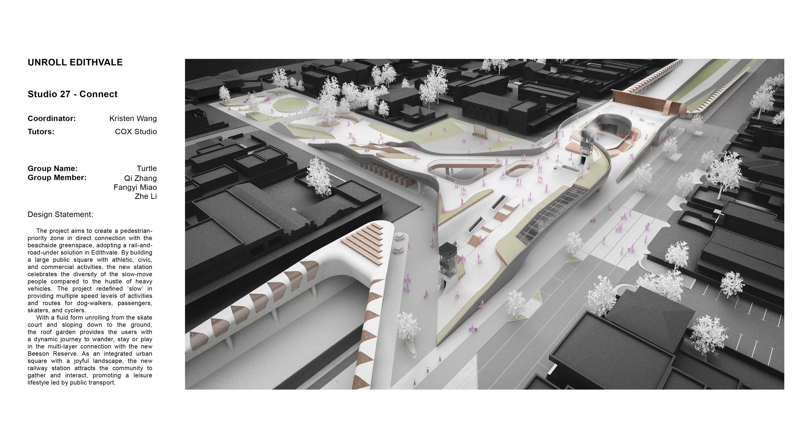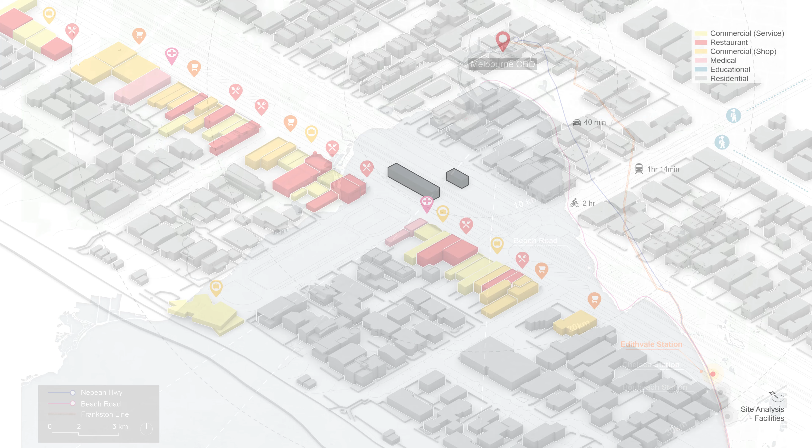Our site is in the suburban half of the Frankston train line, which is 30 kilometers away from CBD but easily accessed by the public transport. The site is mainly surrounded by residential area with a small commercial street along Nepean Highway. Besides convenience shops and restaurants, there are two primary schools in this area.

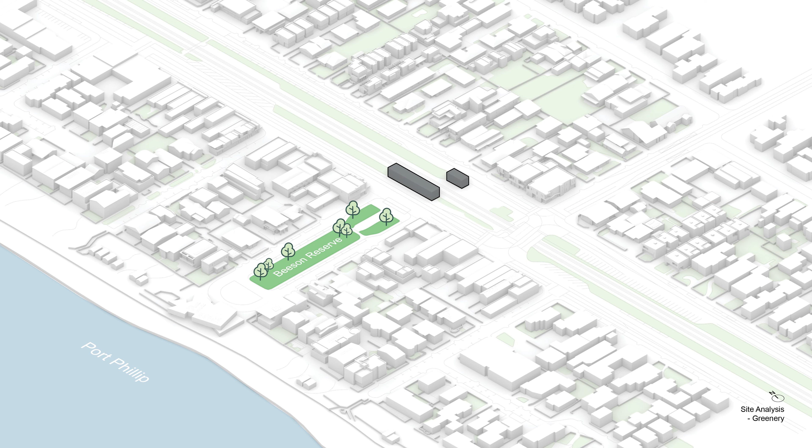Compared with other sites, Edithvale has an existing green space named Beeson Reserve, connected with Port Phillip. It is the only public space in this area, but not used quite well. Therefore, we choose Edithvale as our site and hope to use the existing empty space and make better connection to the beach. For the transport system, the current station is closed road type, which blocks the local circulation a lot. Nepean Highway and Edithvale Road are the main streets in this district.

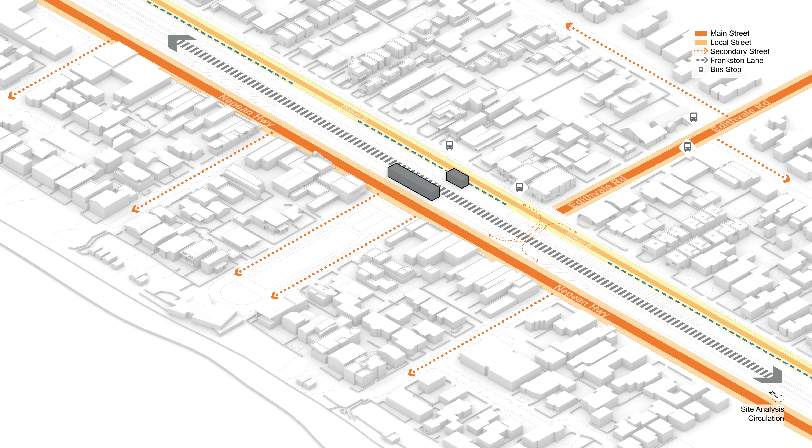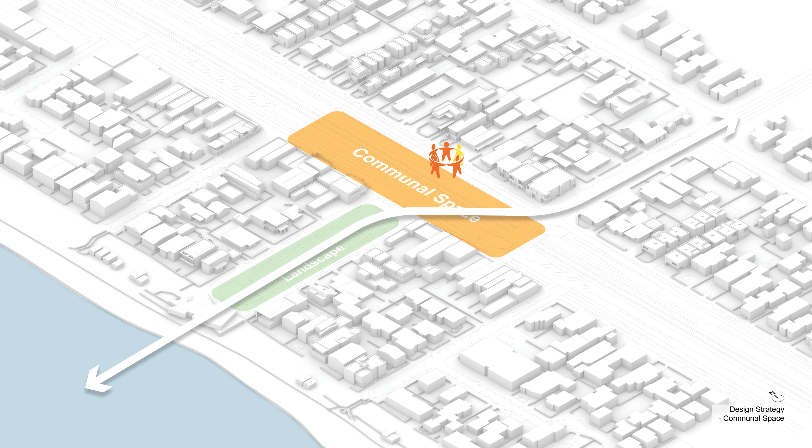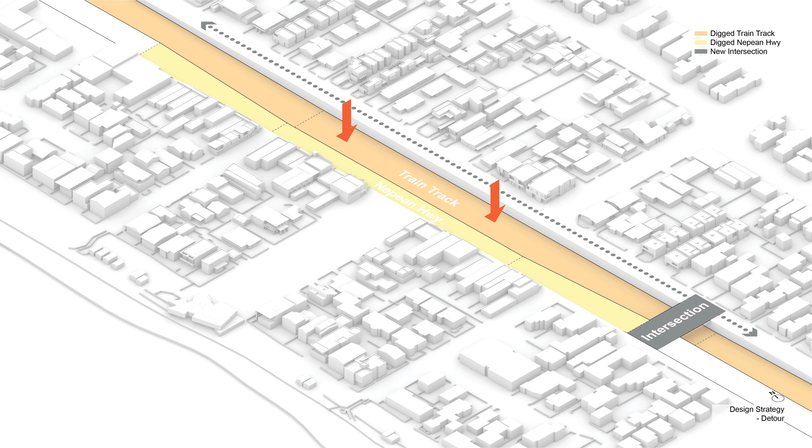For concept, we firstly want to bridge the green empty space with eastern residential area to build a strong connection for pedestrians. And then we want to add a car-free communal space in the center to encourage residents to come here and provide a space where people can really sit down and relax. But the problem is, Nepean Highway and the current train line highly block pedestrian circulation. So to move towards our scope, we must dig down both Nepean Highway and train line, but keep Station Street on the ground level for basic vehicle circulation.

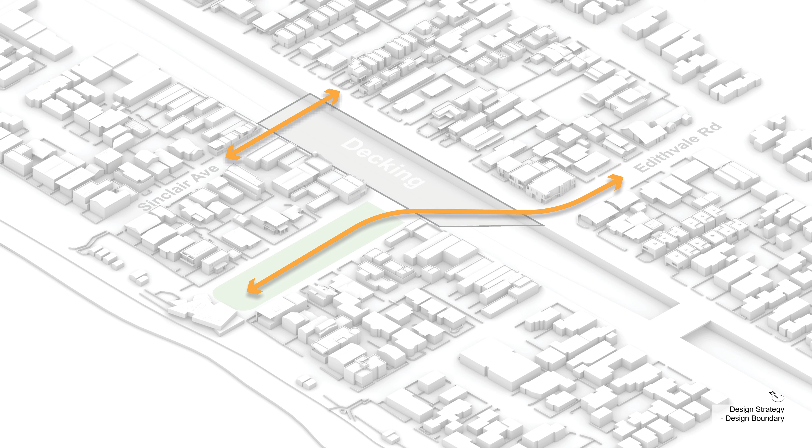At this step, we build the car-free decking for slow-move activities. The decking boundary is defined by the extension of Sinclair Avenue on the northwest and the Edithvale Road on the southeast. And here are the buildings that we have to demolish for new local streets. We moved the current intersection 100 meters away to the south, and the train began to lift after the crossing here. The length of underground train track is around 900 meters in total. One of our concepts is to introduce the local bicycle sport to our project, so we designed a continuous bike lane in Station Street. Considering the safety, the sidewalk is extended 3 meters inwards above the embankment.

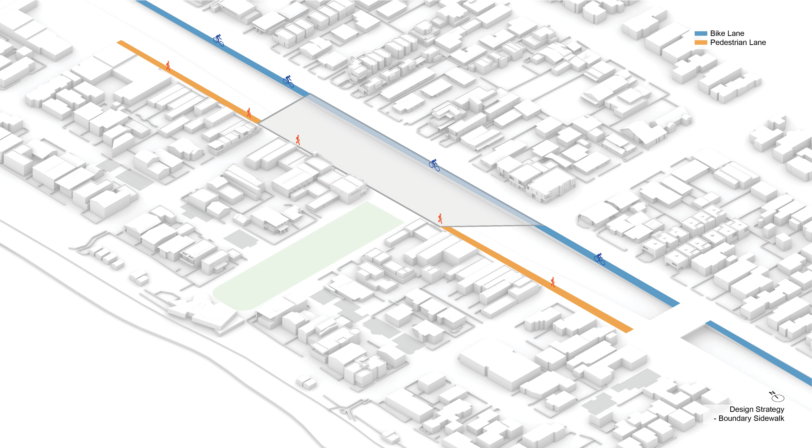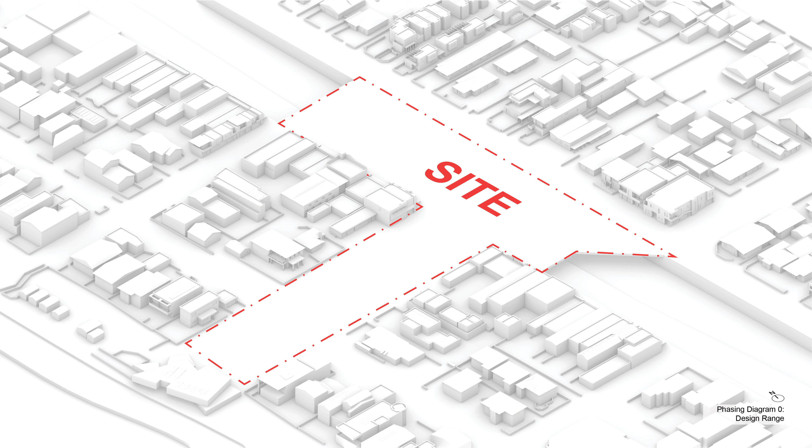After our strategy for the surrounding circulation, now we move to the architectural design process. As the initial concept is to bridge the Edithvale Road and beach, we include Beeson Reserve in our design range. To guide pedestrians to the beach, our functional division begins with the circulation outside the site. In this way, the whole site is cut into 5 parts. As the station is the main body of the project, it is placed in the central area close to the Station Street. The rest 4 areas are considered as activity area and transitional area respectively.

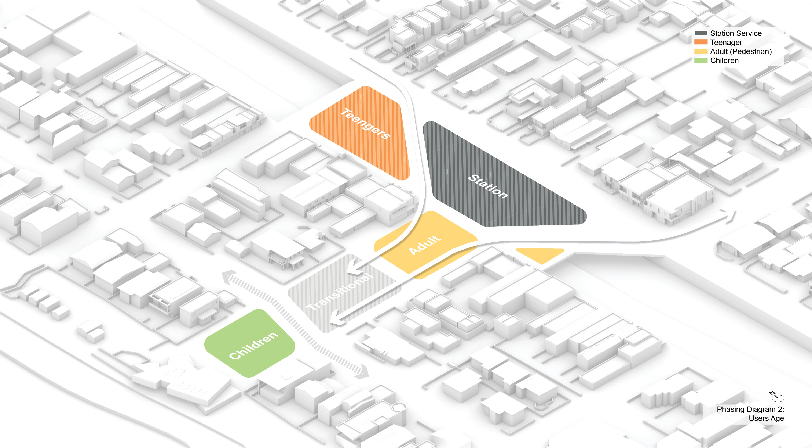When we subdivided the activity areas outside the station, we firstly must ensure that one activity can be featured as the big idea and at the same time others can satisfy different user groups. Therefore, we divided by user's age, that is children, teenager, and adult. Since the original idea was about introducing cycling to our site and promote some local sports, we defined the teenager area on the north side as a skate park, and the southern area as a slow-move pedestrian zone.

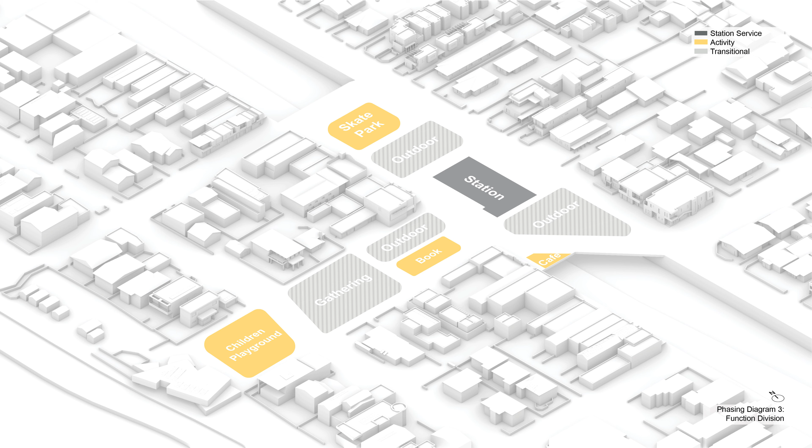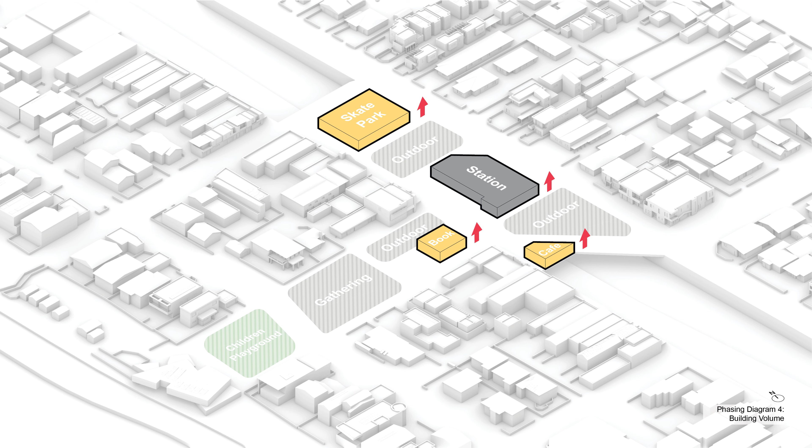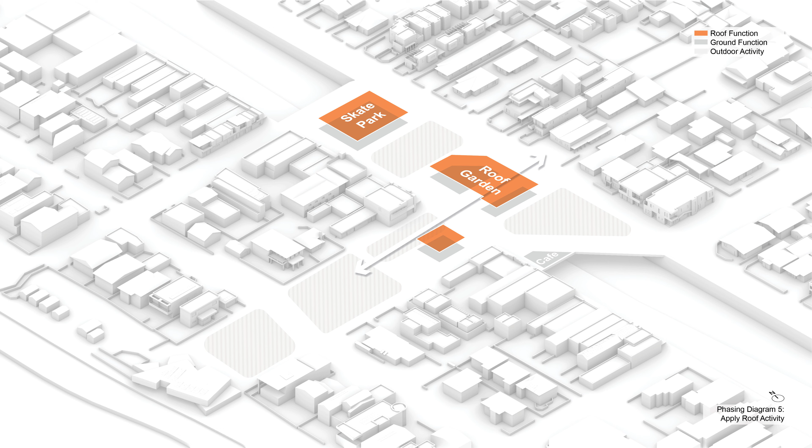In this step, we started adding building volumes. The thing is that we don't want too many indoor elements in the site, so we can see there are always outdoor spaces between each volume as transitions. During the process, we imagine when people come here, they can have a sense that only belongs to the outdoor and a feeling that they can naturally breathe. In addition, as our site is close to the beach and has a quite comfortable climate, we also want to use the roof as an observation deck, so that people can enjoy the local view from the height when they have morning exercise or walk their dog here.

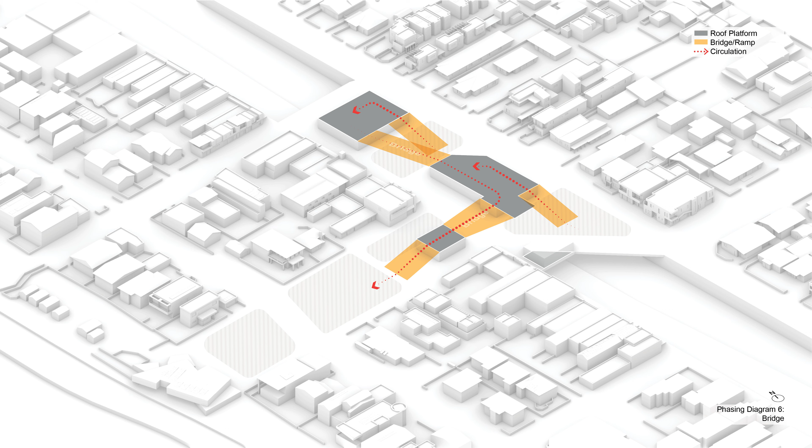Here, we bridge each building volume and connect the ground and roof smoothly. As the skate park is one of the key features in our station, when we designed the form, we decided to introduce a similar design language. The idea is from the flow element in skateboarding, like a constant circulation, so pedestrians can access every part in this project without the lift. We jumped here with more details and the refined shape.

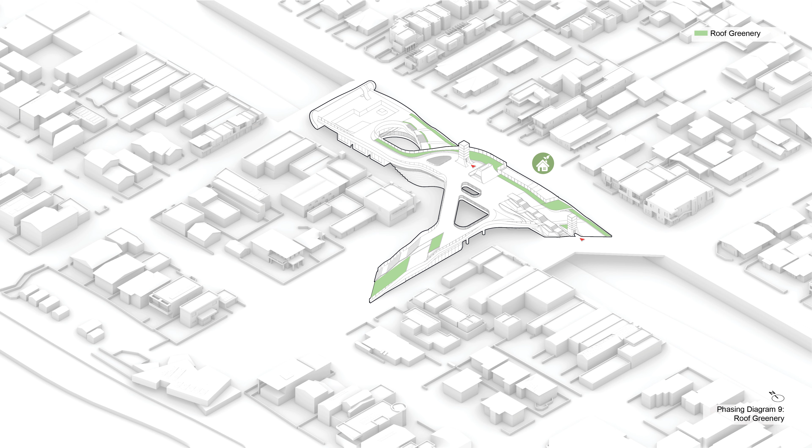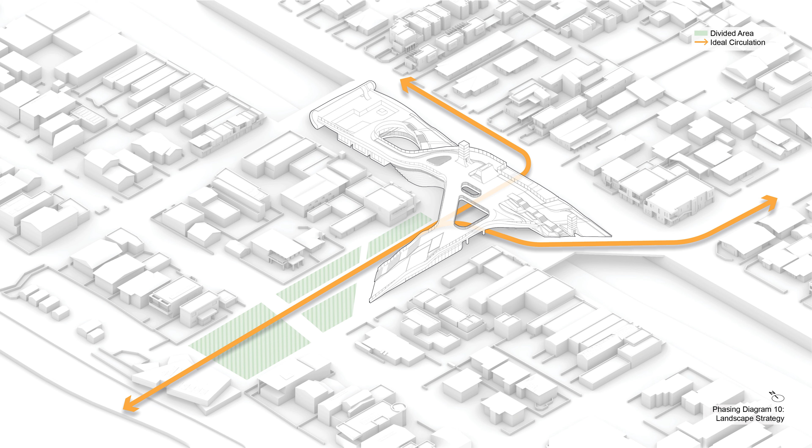To ensure the internal natural light and ventilation, lots of volumes on the roof are subtracted as openings. The vegetation on the roof is used as partition nearby the edge to protect eastern residents' privacy. More importantly, we want to create a sense of roof garden that people can really relax more. And of course, this can form a microclimate in environmental perspective. In terms of the landscape design, the main idea is to create an access directly to the sea and place different programs along the circulation. To interact the station volume and landscape design, we set an outdoor piazza in the center of our site, which represents another slow activity.

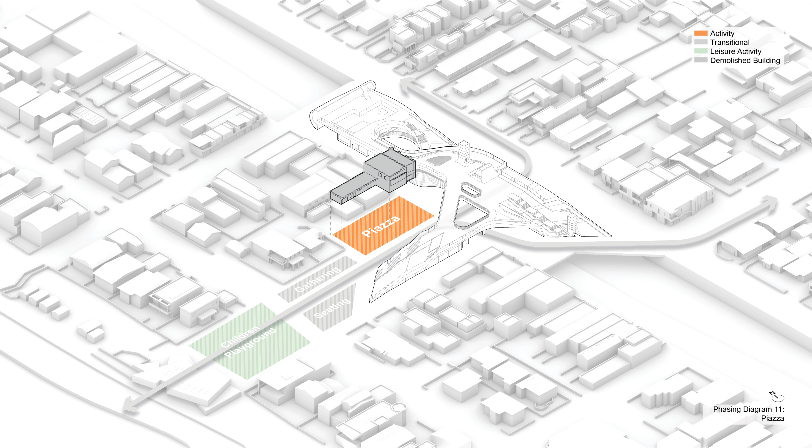For better proportion, we remove the current Thai restaurant. Considering the change with time, the piazza can be a place to sit and perform during the day, while being an outdoor cinema at night.

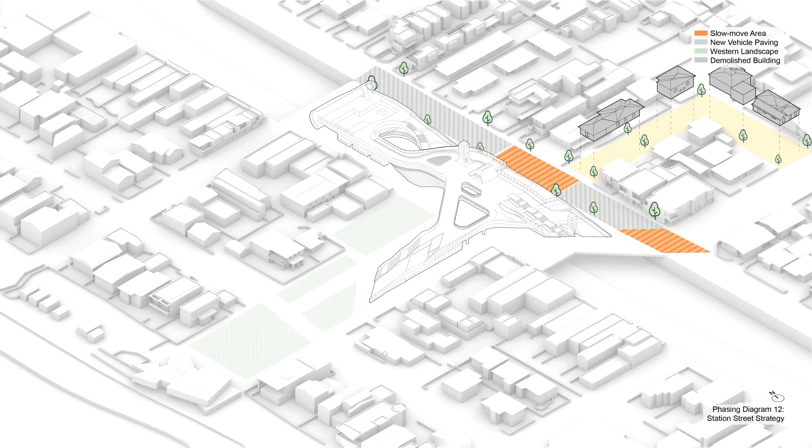Instead of filling intensive programs everywhere, we are trying to keep the space as empty as possible actually. Because in our opinion, empty means flexible. We give pedestrians the choice to walk freely, but ultimately what they do here is left to the residents themselves. Now we move to the technical drawings for more details.

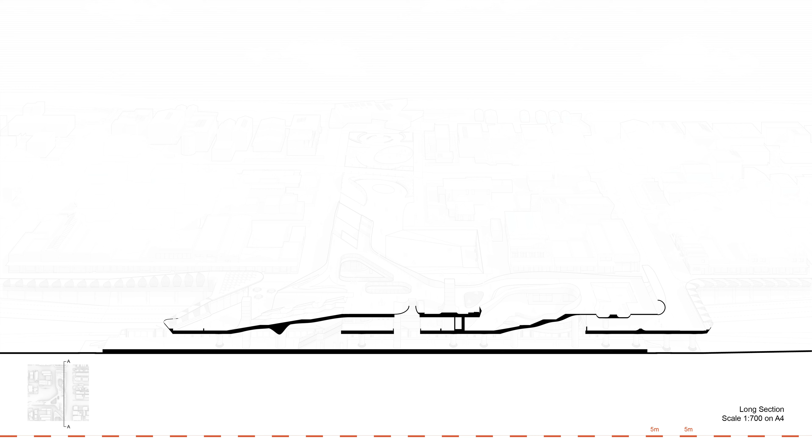Here the south-north section cuts through the platform and station area. The ramp connecting the roof is a key feature of our design, forming the consistent surface. The interior height gradually increases with the roof ramp, which creates 3 unique areas divided by the roof. We believe it can give travelers a different spatial experience that they can only feel in this project.

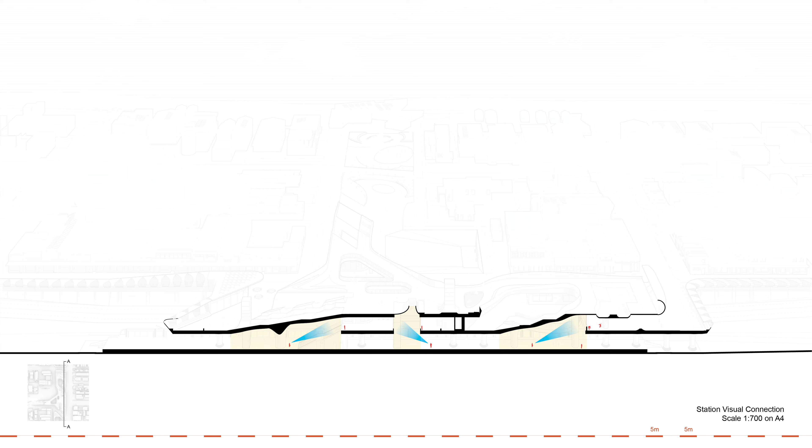Apart from passive ventilation created by the opening of the space, more importantly, it provides a visual connection to passengers and makes them safer. Above the platform roof, there are the pedestrian-priority zone, roof garden, and skate park, respectively.

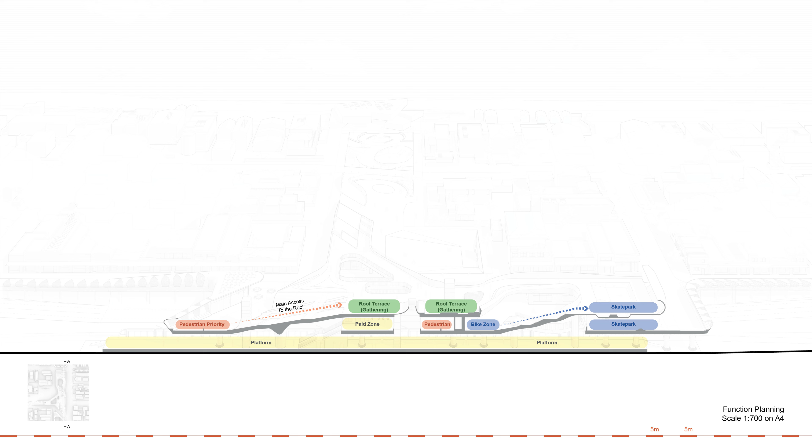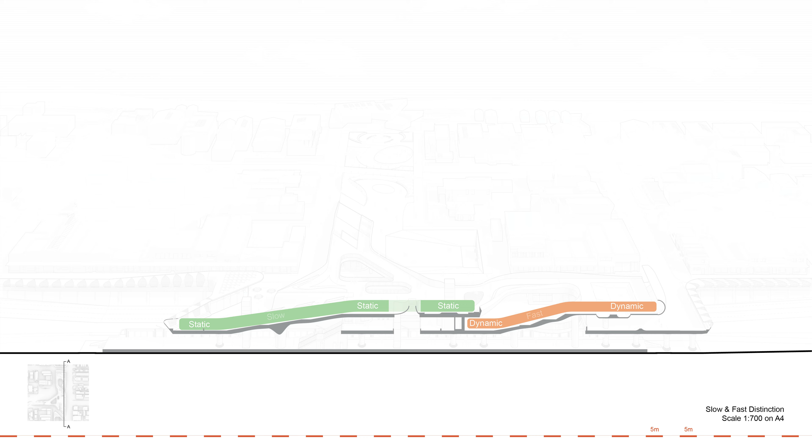From dynamic and static perspective, the pedestrian area with slow activity is set in the south, while the skate park and the bicycle area is set in the north. The two are only connected by the transitional pedestrian bridge. Here is how it looks like from the sectional view.

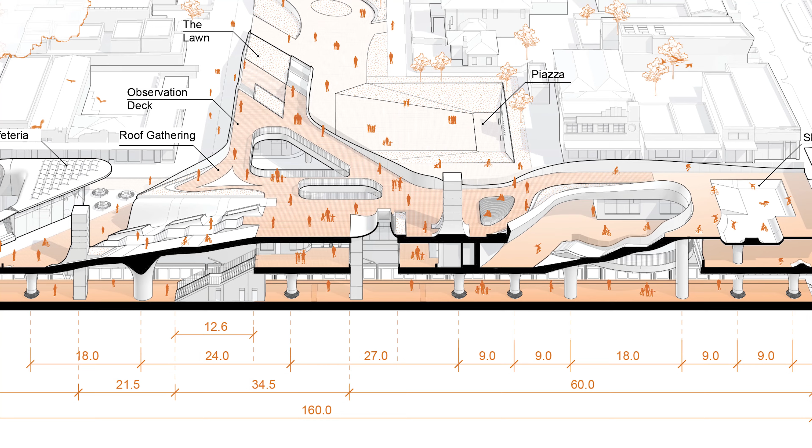Since there is not much population in our site, we changed the current side platform into an island platform to improve the space utilization and solve the structural problems. The spacing of the columns is in units of 9 meters. The distance from staircases to anywhere on the platform is less than 16 meters. And the whole length of the platform is 160 meters as required.

What's interesting here is that the southern platform is outside the range of the deck, which gives the travelers another perspective on the design. As our station is set underground, we designed a skylight on the highest roof for natural ventilation. The drawing on the right shows our design of construction details.

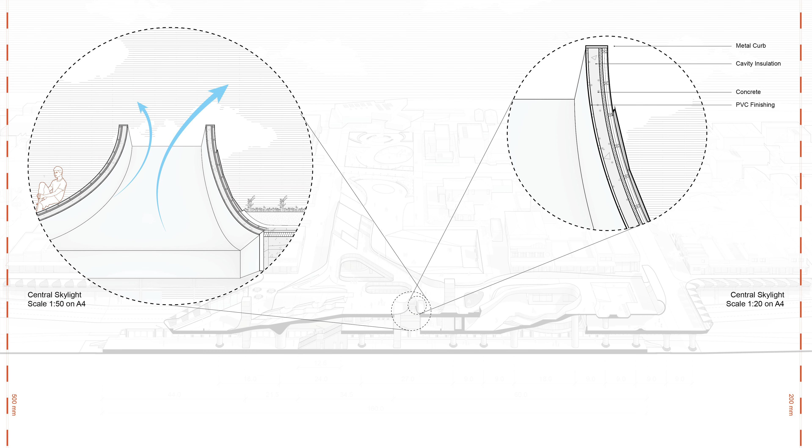Basically, the main material is concrete for the curved shape and some PVC with light color for finish. We designed the boundary to tilt outwards so that concrete walls can reflect noise from below and provide quiet space for the pedestrian-priority zone. The combination of the walls and the pillars also gives the pedestrian perspective to the south.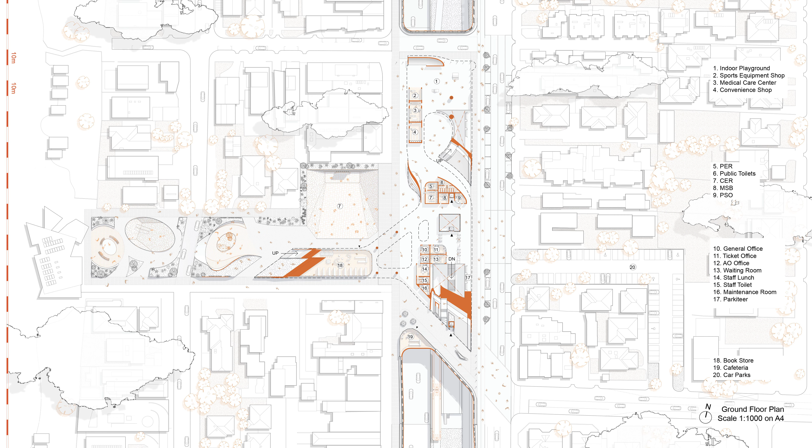Here we zoom in the station service area. The pavement on Station Street is replaced with stone to emphasize the entrance and build a slow area. Due to the opening, the indoor circulation is divided into 2 parts. The south side is the paid zone, including offices and waiting room, while the north side is the pedestrian area.

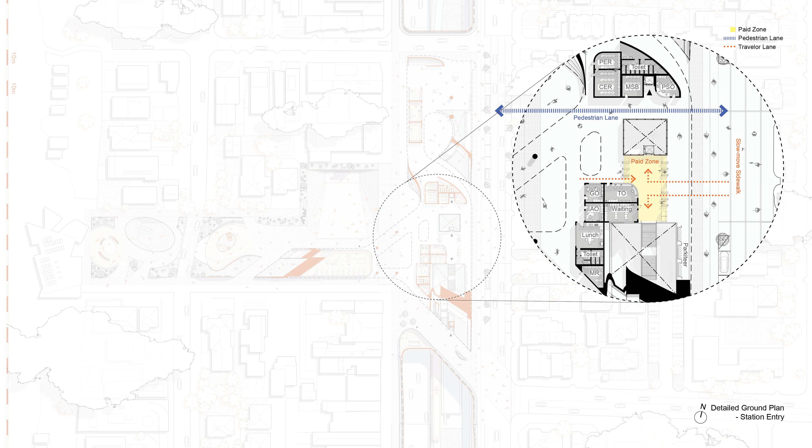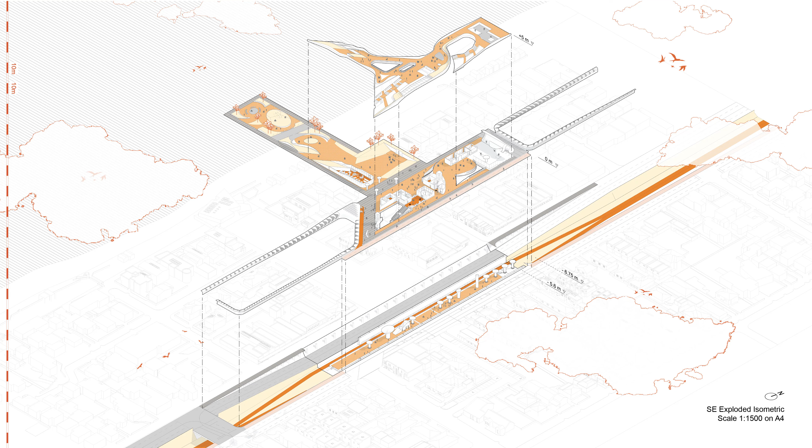We can see the roof is an integrated surface rolling from the skate park to the beach and to both entrances. The roof garden is 5 meters above the ground and the platform is 5.8 meters underground. In terms of the vertical circulation, we set 4 traffic cores in total. The main access to the platform is the stair and lift in the center of the station volume.

A secondary lift is located in the south pedestrian zone, and a public lift connects the roof garden with ground level. This one shows the passenger circulation mainly from the center of Station Street. The secondary entry is in the southern pedestrian area.

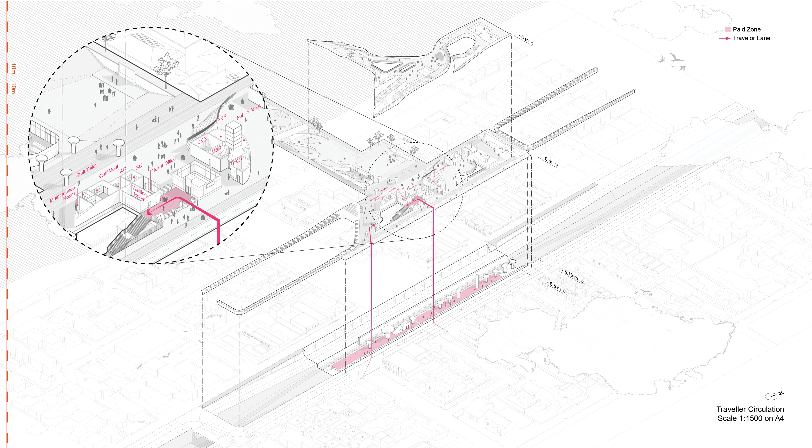Pedestrian circulation. We can see pedestrians entering the decking from the southeast corner to the small coffee shop on the left, turn right to reach the roof garden and enjoy the view around the site. The yellow area on the ground is the main pedestrian area that we would ideally use to connect Edithvale Road to the beach. On the west side, we can see the circulation through the bookshop, lawn, and children's playground, and finally reach the seating area.

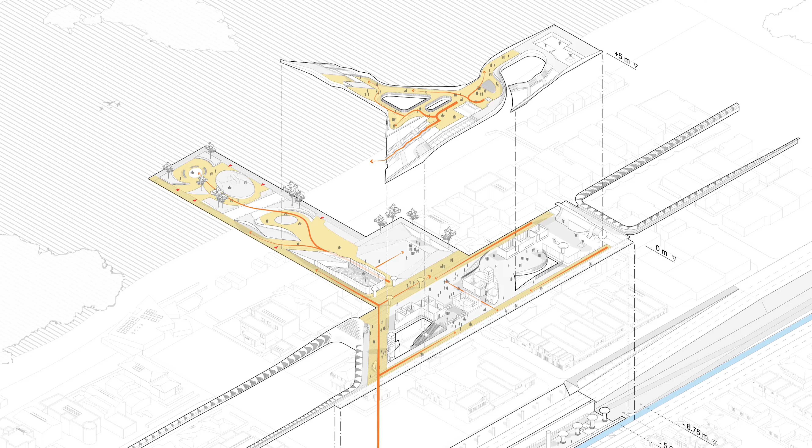In terms of the structural system, there are 3 vertical supporting elements. The main structure located on the platform is the mushroom columns. Besides, there are 3 rows of cylinder columns along the separation wall and retaining walls to support the huge deck. The third supporting element is the structural walls on the ground floor supporting the roof.

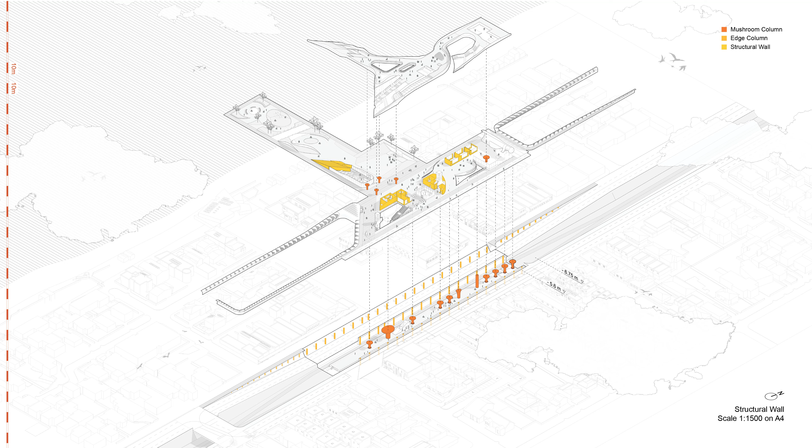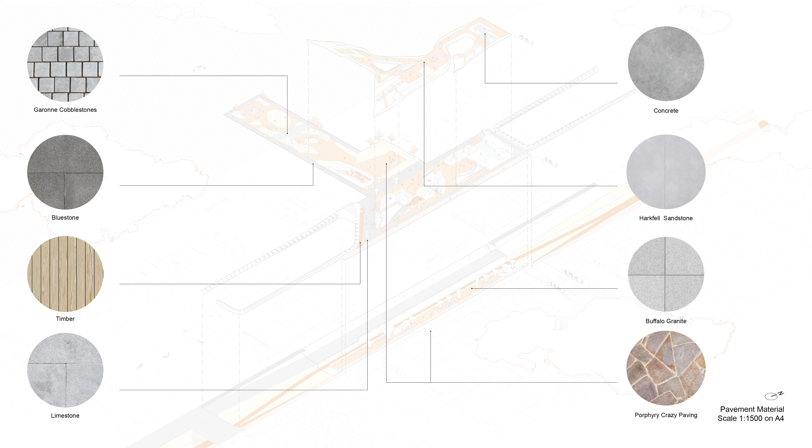For the finished materials, because we have created such an unusual and continuous surface, we decided to use coated steel and timbercrete, which has a heavier color and suburban sense, so that the vertical elements can form a contrast with the horizontal pavements. In the roof plan, the space above the station volume is decided as the static gathering space, where space leading to the beach is mainly for circulation.

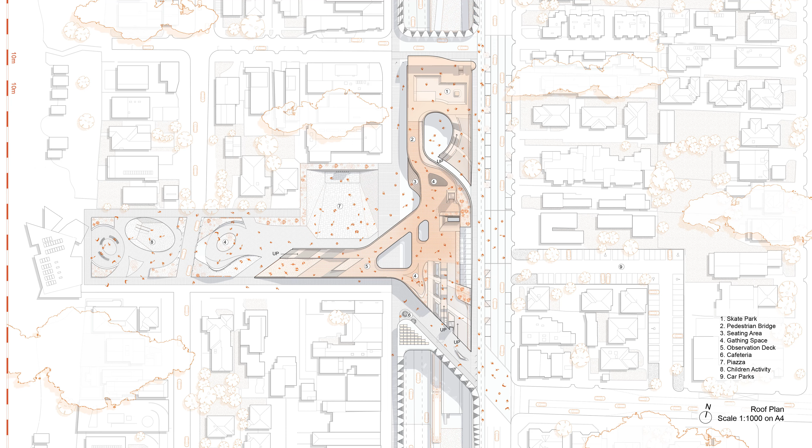The piazza on the ground level is embraced by the roof volume. What we are trying to do here is to make pedestrians see different angles of the views when they take a walk in the roof garden. When we designed the connection between the ground and the roof, we divided here into 3 parts. From left to right, there are the skylights, steps, and ramps, providing pedestrians with various ways to access.

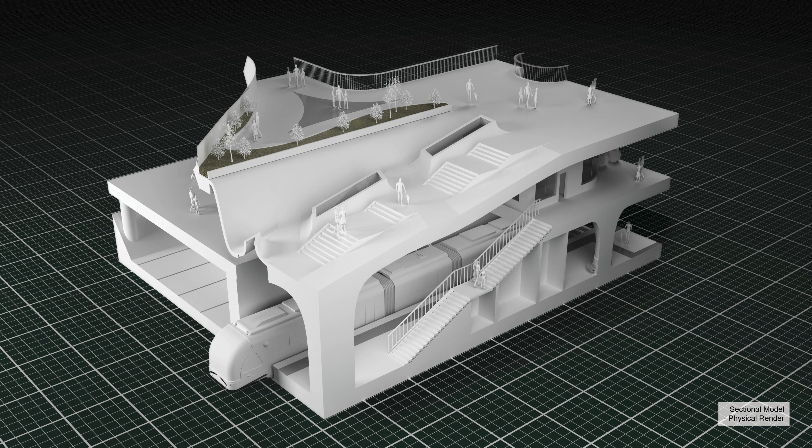Section cuts through the gate line. If we look at the background, we raise the lifts to make it a landmark, so that people can know where the entrance to the station is. Since the platform is 6 meters underground, we were thinking to use the ground source heat pump to balance indoor temperature. The system uses the temperature difference between the ground and the soil below to provide cooling in summer and heating in winter. The solar panel above the library can power it. Besides the station itself, we think it can also work for nearby residents.

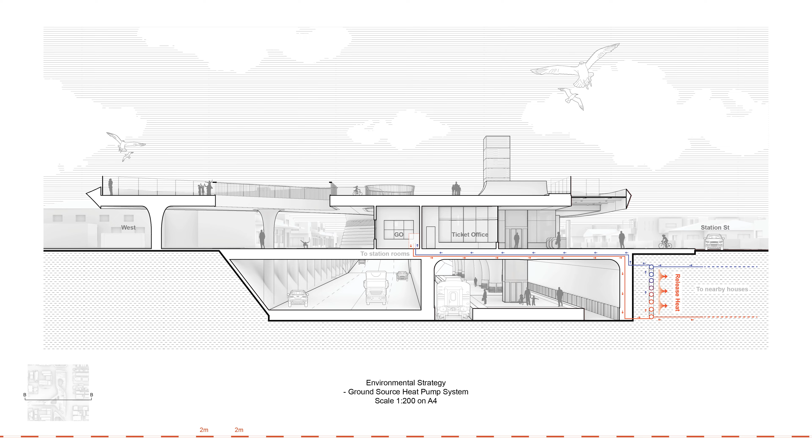The main structural material in our proposal is reinforced concrete, and we set several water tanks under the western space to collect rainwater. Section cuts through the skate park. For the gap between roof and ground level, we didn't close the space, so that it can provide natural ventilation and visual connection to the platform. For the underground platform, as most functional rooms have been set on the ground level, there are only 3 rooms beneath the staircase: cleaner room, storage, and Myki equipment room.

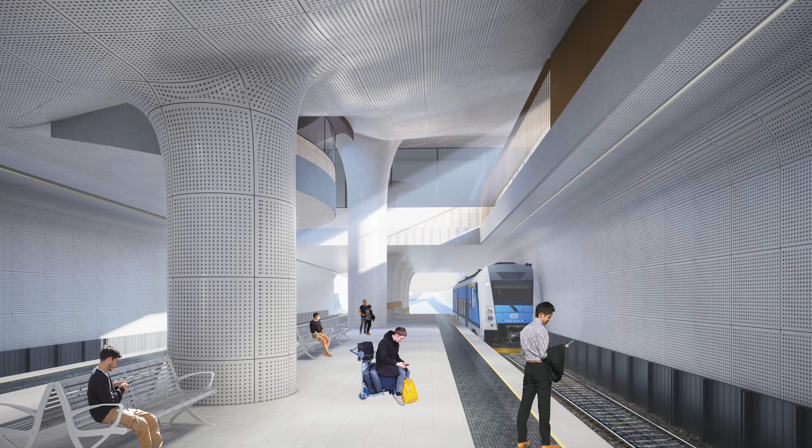And here, perspective from the north platform. Pedestrians can directly see the skate park above them when they arrive. As it is an open underground platform, we decorated the whole interior with perforated aluminium plate with light color, which can absorb noise and increase solar diffuse.

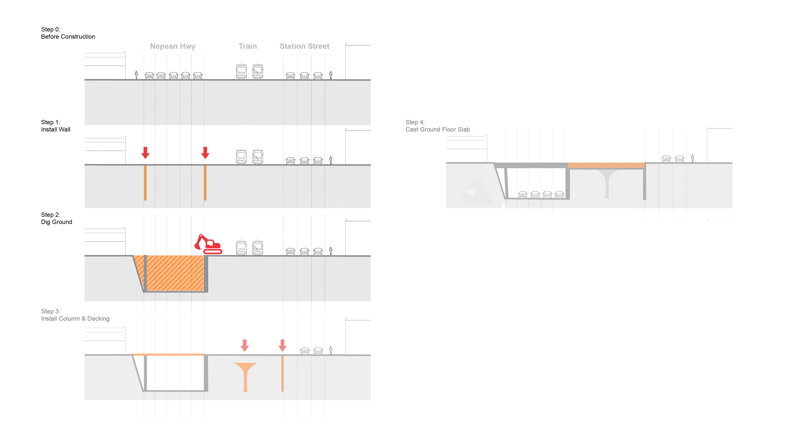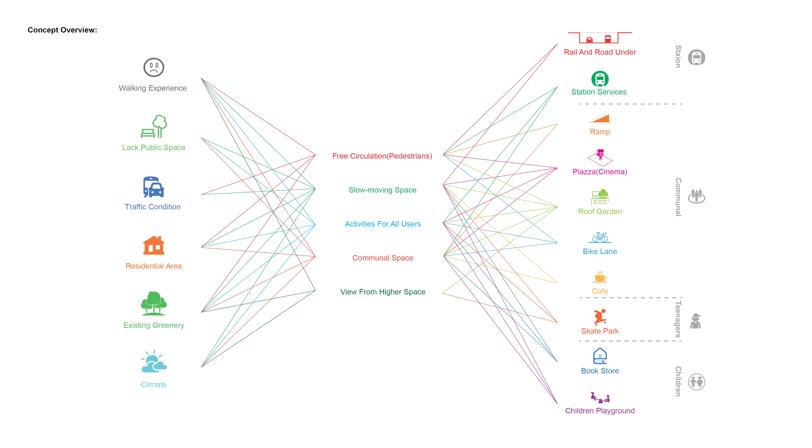And finally, in the construction phasing diagram, we plan to install a retaining wall on Nepean Highway and dig it down at first. Then we stop the train and install columns there. To shorten the construction period, we aim to use the top-down construction method to build the new train station. In a word, our concept starts from the current site condition and local cycling sport, aims to bring back the communal space belonging to Edithvale residents and serves for all user groups.

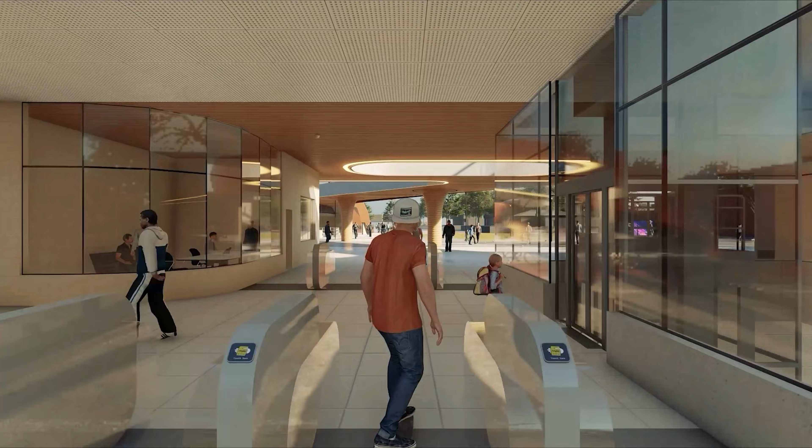The project aims to create a pedestrian-priority zone in direct connection with the beachside greenspace, adopting a rail and road-under solution in Edithvale. By building a large public square with athletic, civic, and commercial activities, the new station celebrates the diversity of the slow-moving people compared to the hostile or heavy vehicles. The project redefines slow in providing multiple speed levels of activities and routes, for dog walkers, passengers, skaters, and cyclers.

With a fluid form unrolling from the skate court and sloping down to the ground, the roof garden provides the users with a dynamic journey to wander, stay, or play in the multi-layer connection with the new Beeson Reserve. As an integrated urban square with a joyful landscape, the new railway station attracts the community to gather and interact, promoting a leisure lifestyle led by public transport.